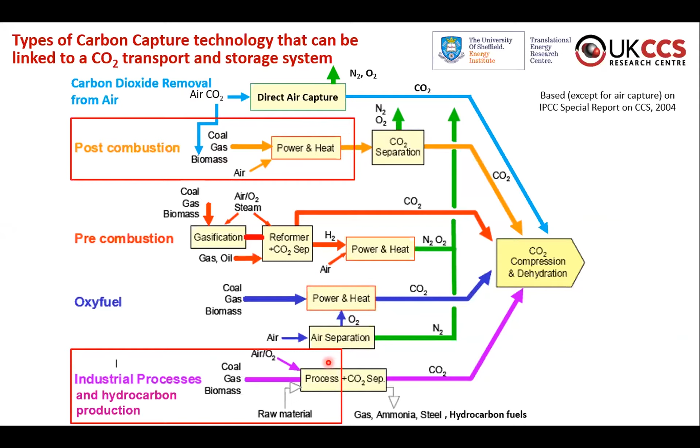It's fairly mature. It looks like it will be deployed in fairly large amounts in the initial rollout, and as I'll show you later, it's likely to keep on going. It's a fairly competitive technology as far as we can see.

So how does it work? Well, there's really only one thing you need to remember about amine post-combustion capture, which is that amines bond to carbon dioxide when it's cold, and they release it when it's warm. That's essentially how everything works.

There is a little bit of finer detail, some chemistry here I'm not going to go into, you can look at afterwards, but one thing you need to remember is for some amines, one molecule of CO2 reacts with two amine molecules, and for other amines, one molecule of CO2 reacts with one amine molecule, depending on the chemistry of the amines. That means amines behave in different ways.

A basic amine is monoethanolamine, MEA, universally known as. These are two carbons, this is an OH group. If it didn't have this NH2, which is basically ammonia, on it, it would be ethanol — it would be drinkable. So the simplest amine is just ammoniated alcohol, a relatively common substance in nature as well.

You can get more complex amines, and they will hold more CO2. Some of them will react faster, but they all come with different characteristics, and you have to take them in the round.

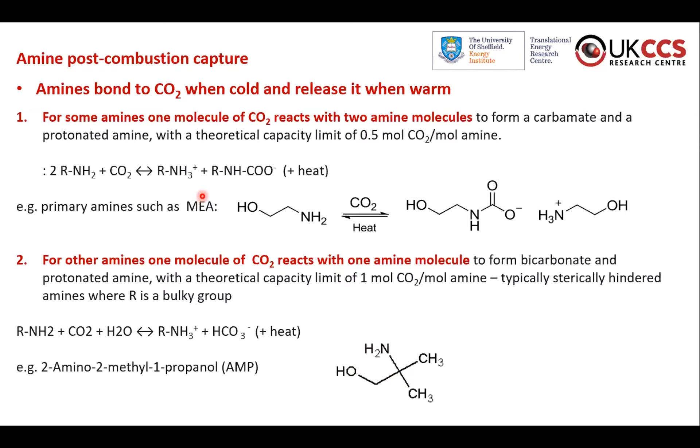So the way you use this characteristic of it grabbing CO2 when it's cold and releasing it when it's hot is you have this circulation diagram, a figure of 8. So we circulate amine in this figure of 8 pattern, and...

The flue gases go through an absorber, which is a large tower, can be as high as nearly 50 meters, filled with corrugated packing, stainless steel, but it looks a bit like corrugated cardboard, which gives a good gas liquid contact area. The whole thing's run at atmospheric pressure.

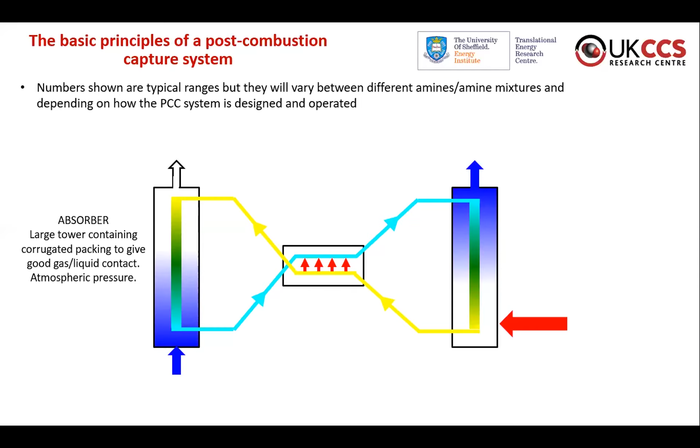Flue gases containing fossil CO2 or CO2 we want to capture come in at the bottom. And what we call lean solvent, lean amine, which has maybe about 0.2 molecules of CO2 per molecule of amine, so it's not saturated, comes in at the top at a relatively low temperature, maybe 40 degrees centigrade. That trickles down over the packing, the flue gas flows upwards, and as a result you take out all or most of the fossil CO2.

That flue gas is then vented to the atmosphere. And then the amine, having picked up the CO2, becomes what's called rich. Depending on the type of amine, it'll have between 0.4 and 0.8 molecules of CO2 per molecule of amine, and it leaves at a slightly higher temperature.

Then to regenerate it, we have what's called a stripper, which is another large tower, probably not quite as big as the absorber because it's operating at pressure, which reduces the volume, typically somewhere between 2 and 5 atmospheres, depending on the amine.

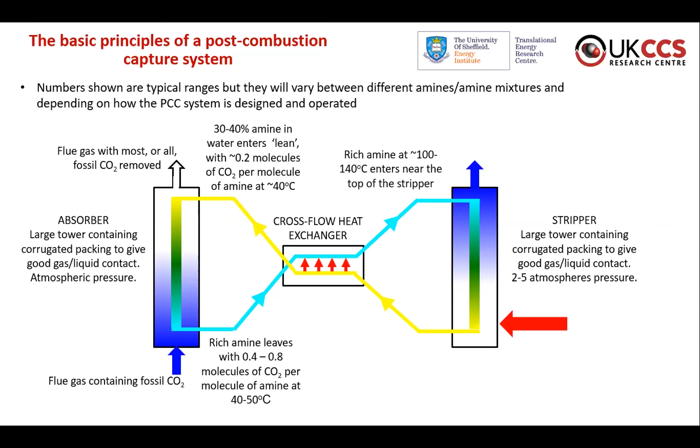Before we put the rich amine in at the top of the tower, it's heated up in something called the cross-flow heat exchanger, so that heats it up to about 140 degrees centigrade. It goes in the top, it trickles down over packing, and steam comes up from the bottom of the stripper, produced by boiling off water vapor, by condensing steam, saturated steam in heating tubes.

That splits the amine CO2 bonds by raising the temperature, and it also provides steam to help carry the CO2 away. After that, the lean amine leaves at the temperature at the bottom of the stripper, somewhere between 120 and 150 degrees C, and high purity CO2 is released, better than 99% purity, mixed in with water vapor. The water vapor is condensed, and the CO2 goes on to be compressed, transported and stored.

So that's the whole process. The equipment's a bit more complicated than that, but the basic concept is very, very simple, and it's been in use for nearly 100 years.

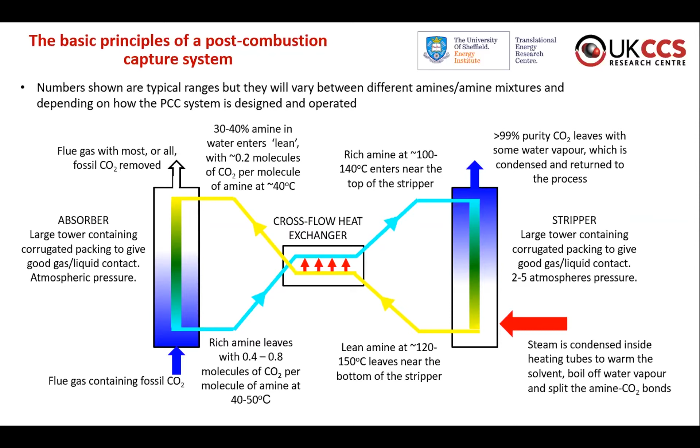I said post-combustion capture was fairly competitive. This was an assessment done for BEIS by Wood, looking at different types of power plants with CO2 capture. So this is a gas turbine combined cycle plant without capture, paying quite a lot of money for CO2 emissions. This is a similar gas power plant, but with post-combustion capture. At the carbon price that was assumed, it's more economic to capture the CO2.

Now, compared with other options, producing and burning hydrogen is less efficient and has higher capital costs, so that's significantly more expensive. There are applications for that, though—we'll talk about it a bit more in the next seminar. If you can store the hydrogen and produce it in a relatively small plant which runs all the time and feeds the storage, and then you draw off the storage infrequently to meet a peaking load, it can be competitive.

But for any reasonable load, certainly above about 50% load factor, post-combustion capture will be cheaper. Also, compared to supercritical CO2 cycle, the Allam cycle, we estimated that it would be competitive, and also compared to using molten carbonate fuel cells. Obviously these technologies are nowhere near as developed as these two, so it's not entirely clear what the actual cost and performance will be. But nonetheless, post-combustion capture looks to be a pretty reasonable option, even though it has, as I say, been around in some form for quite a long time.

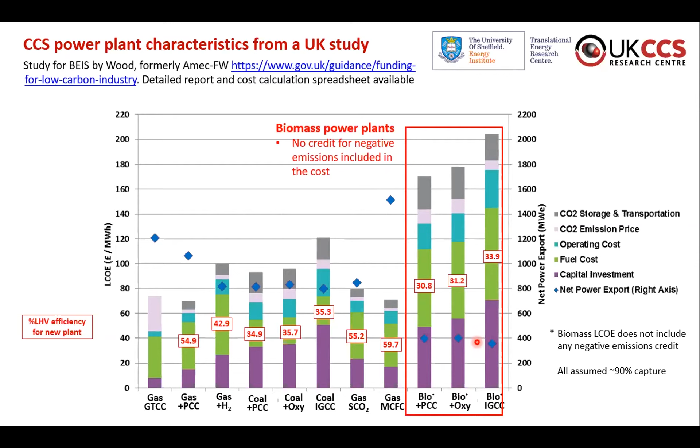Even though the efficiency is higher, the capital cost is expected to be significant, and there may be some technical issues as well. So the bottom line is post-combustion capture looks like it's going to be around for a while, particularly as it gets developed, and costs will inevitably come down a bit.

One of the reasons post-combustion capture works so well is that you can supply heat to regenerate the solvent very effectively. You need quite a lot of heat, but it's at low temperatures, so it's of very little value for generating electricity. You're condensing steam from the power plant in heating tubes, and that steam was going to be condensed anyway in the power plant steam condenser. So you typically get 4 or more units of heat for every unit of reduction in electricity output.

It also means, to get that ratio, you need to run a CHP plant if you've got a non-power application in industry to get the same benefit. And you will also, as well as that heat, need some electricity to run the fans, and in particular the compressor for the CO2. Just to illustrate that, this is the energy, 100 units of energy going into a gas turbine on a gas turbine combined cycle.

It's a slightly older unit, produces 37 units of electrical output. The rest of the energy is heat in the exhaust gases, which go to the heat recovery steam generator, the waste heat boiler. Most of that ends up as energy in steam, but the steam turbine can only extract a bit less than half of that, about 40%, on a plant without capture. And the rest of the energy goes through this thick grey arrow to the condenser.

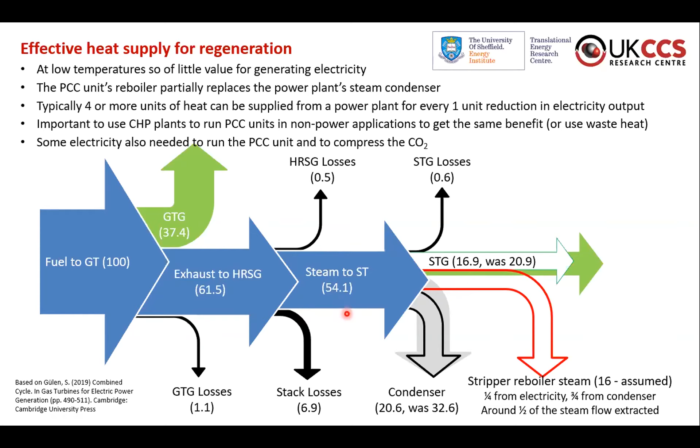This steam turbine process and the condensation, as you can see, in some ways is not very efficient. It's as efficient as it can be thermodynamically, but it was going to throw away a lot of heat anyway. You might as well throw it into the post-combustion capture plant. It's quite hard for people to get this because they don't often look at linking heat supply with efficient processing of fuel energy. But once you do link that, and this is what I was basically working on 20 years ago, post-combustion capture looks very, very good.

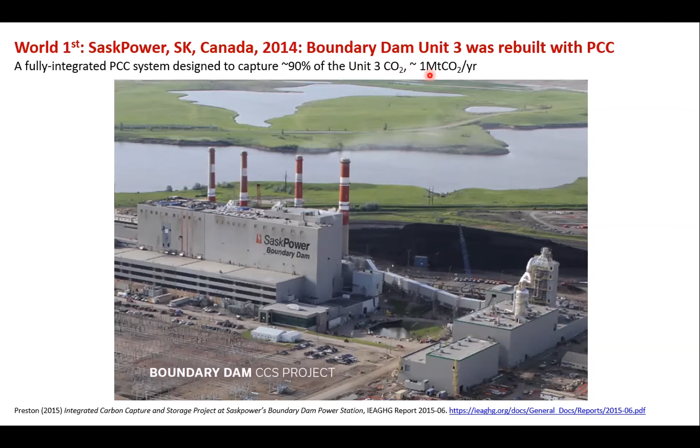Everything's hidden in a box. It gets very, very cold in Saskatchewan in the winter, so you're not able to put the plant outside. This unit captures about 90% of the CO2, and it's about 1 million tons of CO2 per year. I'd say that was the first one. The second large unit on flue gas was at Petra Nova power plant in Texas, much warmer. You can see everything's outside here, they don't worry.

This one's a bit bigger, captured about 1.6 million tons of CO2 per year. Here's the absorber again, and the stripper. Here's the flue gas duct, in this case a round one, taking the flue gas to the flue gas desulfurization unit, which is required because this is a coal plant.

They didn't take steam from the power plant itself. They had a combined heat and power unit powered by natural gas, which is relatively cheap in the US. This unit became operational in January 2017, and it shut down in mid-2020. I'll discuss that in a moment.

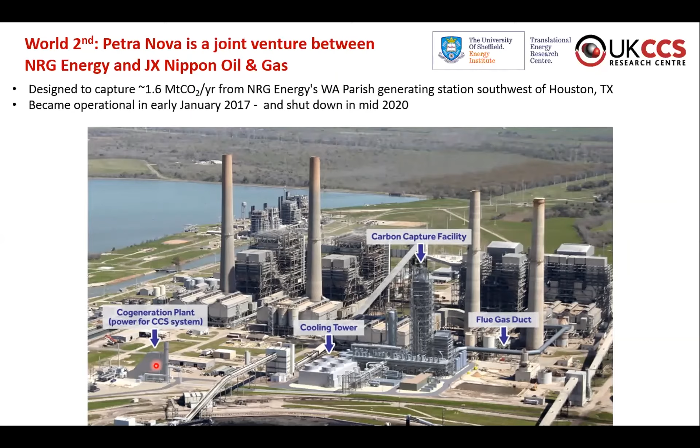Experience from these two units is that the operating costs, effectively the levelized cost of capture, the total estimated cost for capturing CO2 can be quite high. You have a capital cost element, quite high for Boundary Dam. It's an expensive place to build things, Saskatchewan, and it was a small plant. Much lower for Petra Nova - you get good productivity in Texas from labor. But as well as the capital, you've got running costs.

You've got a fuel cost, the extra fuel that's burnt, a relatively small contribution. You've got some fixed operation and maintenance. And then, fairly surprisingly, there was a very large element for variable operation and maintenance reported for Boundary Dam by the Global CCS Institute. This is basically for replacing losses in the solvent and managing ways to keep it pure enough to operate. As you can see from the text below, this would be expected to be of the order of $5 per ton, and it's well over 20.

It's also relatively high for the Petra Nova plant. Now, Boundary Dam is still running - I suspect they've got this cost down a bit, although it's probably still high. Petra Nova isn't running, and I think the reason could be that if you look at the total variable costs, it's over $20 a ton of CO2, and this unit was sending its CO2 for enhanced oil recovery, where a ballpark figure for the value of CO2 is about $20 per ton.

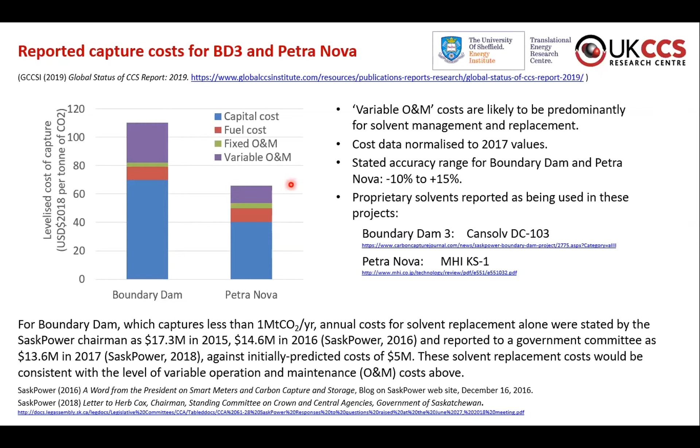So some key priorities in light of what you have to see as problems. Obviously they're successful in that they ran, but not as successful as we would have liked. The first point is that it's not clear what's happened. There have been reports on these plants, but many of the key details are omitted on the grounds of the solvent being commercial and requiring confidentiality. So we just don't know what's happened - you're looking for details in obscure places and certainly not getting the full picture.

However, it is pretty clear from evidence given to the Saskatchewan Government Committee that higher than expected solvent management costs were incurred. And as I say, we do know that Petra Nova isn't working, so they must have higher running costs than revenues.

So the obvious response to this first problem is, if you've got a project that's only possible because of government support, require full disclosure of key features and results, especially the problems, to allow industry learning by doing. It isn't necessarily giving away all the secrets, it's just saying did it work, how did it work, what were the numbers. I think quite often these are kept secret because, particularly when you get a problem, people are embarrassed, not unnaturally. But if we don't learn from the problems, they'll keep being repeated.

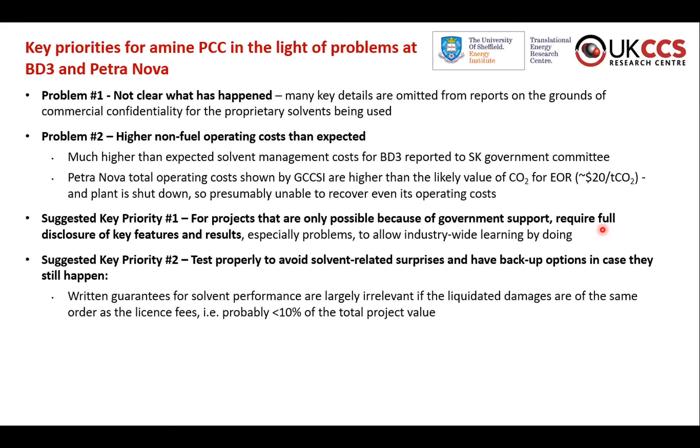And then, particularly on this solvent management issue, it's important to test properly to avoid what I call solvent-related surprises, and also to have some backup options in case they still happen. What you see is that when you get a guarantee for solvent performance, it's of the same order as the license fees - probably less than 10% of the total project value - and it really doesn't compensate for the potential problems.

So the only assurance that things will actually work is to do extended testing on a realistic pilot plant, ideally using the actual flue gas from the plant that you're going to retrofit, if it's a retrofit or a very similar plant. And you need to test for about a year, because it can take quite a long time for these degradation reactions in the solvent to happen.

It's important that you demonstrate that you can reclaim the solvent, which is separate the good solvent from the impurities. That's a very important part, and it's often omitted from research-type pilot tests.

Also, it's very important that you can change to an alternative solvent if you're having problems. You'd want to do this anyway because solvents are going to be improved, but you might need to do it in a hurry if your costs are too high. This is apparently more of a commercial issue than a technical issue. Boundary Dam, in fact, I believe was designed for alternative solvents, but they found they were tied up by contractual arrangements and couldn't change.

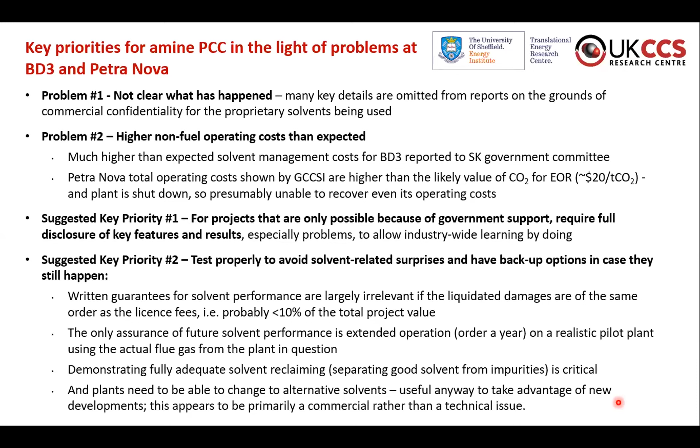So solvent selection criteria is a fairly important part of the overall process to get a successful project. Health and safety is your first consideration, and absolute standards have to be met.

And what appears to be one of the more interesting areas is conversion of trace emissions of amines, parts per million coming over in the flue gas, but relatively noticeable amounts when you've got very large plants, and particularly multiple very large plants, as the UK is expecting to have. These traces of amines can be converted to nitrosamines in the atmosphere, and those are highly carcinogenic, and we've got very low environmental loads for those.

At the moment that has to be assessed by modelling. The techniques for modelling are still being developed, and when we get larger plants, we'll be able to do more measurements as well. So this is an area of interest, and John Henderson from the Environment Agency will be talking about environmental aspects of CCS later in the series.

You also want to be able to capture a lot of the CO2 that's coming out, and we're looking at now going above 95% capture. Overall costs are obviously important - we want to get them as low as possible. There's a lot of different elements for those, which I'm not going to go through, but it's a package.

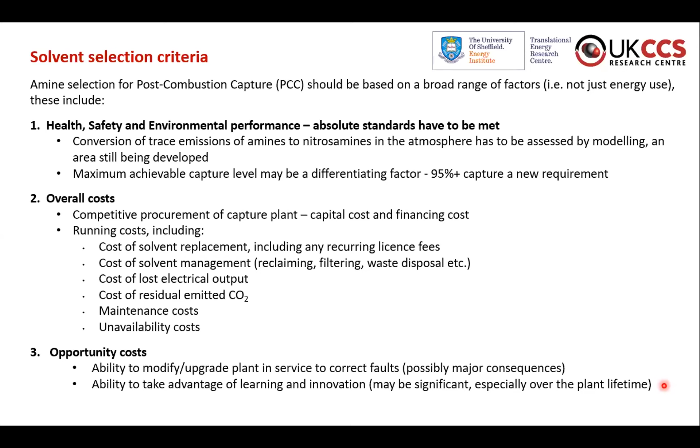Some trade-offs - I mentioned that you get different properties. Typically, primary and secondary amines, types of amines, have higher rates of reaction.

Monoethanolamine, MEA, is one of the oldest in use, and it's got a high reaction rate. But it can only get this 1 to 2 stoichiometry with CO2, so it can't latch onto as much CO2 as some of the other amines, which bind 1 to 1. Another type of amine, tertiary amines, have high capacities, but the kinetics are lower, so you try and use them in blends. So you've got a lot of permutations, a lot of trade-offs.

But then from a health and environmental safety perspective, MEA is biodegradable, so it's often found in nature. Some other amines are more toxic and not so easily biodegraded. Secondary amines, not primary amines, can react with NOx in the flue gas to form nitrosamines, and the reactivity varies with the amine structure. So you have a fairly complex balance of factors to take into account when selecting which amine to use.

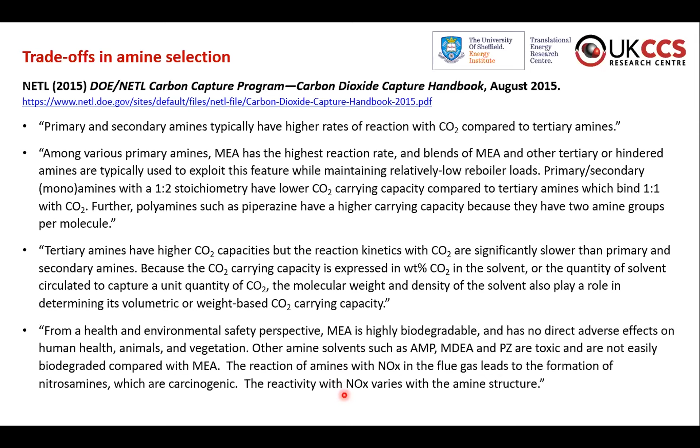So this, I think, conversion in the atmosphere is the main consideration in getting satisfactory environmental performance. As I say, it's too low to measure easily - it has to be estimated through modeling.

You need to look at the amount and type of amines coming out in the vented flue gas, and you've got to look at the amines from other plants in the same area. You've got to look at what's in the atmosphere in terms of NOx, and you've got to look at atmospheric conditions. So people will be doing site-specific modeling to work out how much is safe to emit from a plant.

You can do a lot on the plant itself to control what comes out. I've put this in the PCC emissions control triangle. First, select the amine, which will give you a mix of properties: reduce degradation and impurity addition rates, and accelerate removals, so you keep your amine nice and clean. That helps a lot. You then trap potential emissions at the absorber exit.

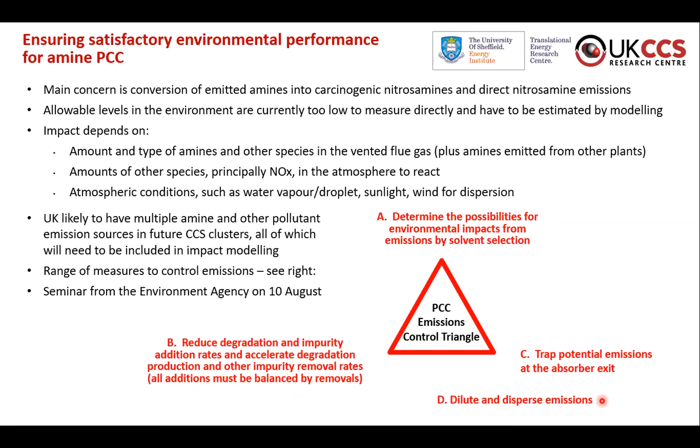You can do an awful lot there with washing it with an acid solution. And then finally, you dilute and disperse the emissions by making sure that you emit them high enough and with a flue gas stream that's warm enough to rise and mix. There's a lot of detail in there which I'm not going to discuss, but it's there to look at afterwards.

One of the areas that's received a lot of attention is the energy that different solvents require and the effect this has on the overall cost. But as I say, it's a complete package.

When you look at the estimated costs, this is from a study done for the World Bank, a retrofit to a gas turbine combined cycle plant in Mexico. If you take a range of commercial solvents, these are the ones that could be in use now - basically there's no difference between the numbers, and indeed they're not much cheaper than monoethanolamine at 30%. We'd be looking at using 35% by weight now, which would make it a bit better. So it does seem that, at least superficially, there isn't a lot of difference between solvents.

The differences will come in the fine detail, and I think particularly in terms of the environmental performance.

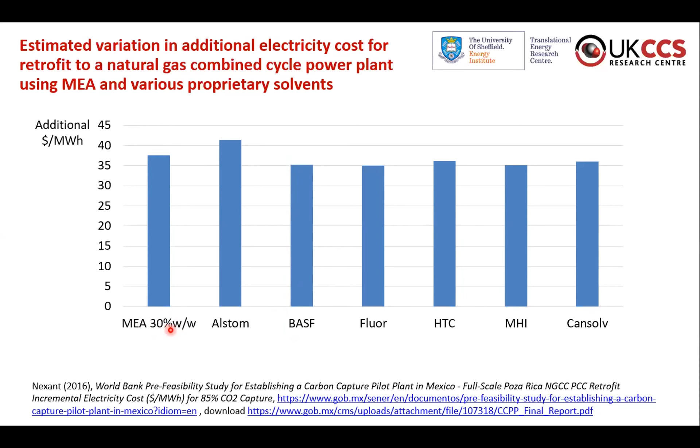Some examples - we might see in the UK, this is one that's actually happening: a post-combustion capture plant at Tata Chemicals, Northwich in Cheshire. BEIS kindly gave 4.2 million towards it. It'll capture 40,000 tons of CO2 per year, so it's quite small - a 25th of the million ton a year size - but nonetheless it looks pretty big. It's probably about as high as a real absorber would be, about 50 meters.

This was supplied by Pentair Union. It uses 35% by weight MEA, and this is continuously cleaned, continuously reclaimed. Pentair Union have built over 20 plants around this size, mostly using natural gas sources. So this will be running soon - really looking forward to seeing that.

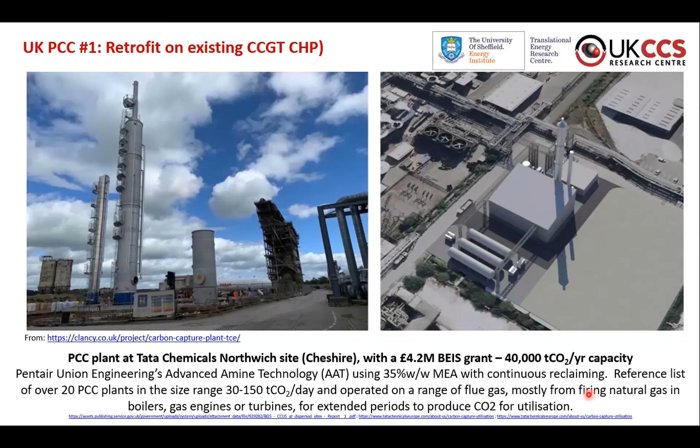However, the big plants in the UK being planned - places like Teesside, Humberside - post-combustion on large gas turbines, they follow on from a study that was done by the Energy Technologies Institute a few years ago, looking at bringing the cost of gas power with carbon capture and storage down by building large units with multiple turbines, in this case 5. I think probably more realistic to find 2 at the moment.

So we've got a gas turbine here - this is opened up, this is the actual turbine, the gas turbine. This is the heat recovery steam generator. This is a stack vent for when you're not capturing, and then this is going through to the capture unit and the stripper, all combined here. And this is the cooling. As I say, there's 5 units shown here to get economy of scale.

You can look at the report for this - it's available now, it's quite a lot of documents, and also an even more detailed FEED study, front-end engineering design study, with about 200 documents for a 1 million tonne a year retrofit that was in fact never built, in Norway, available on our website. So you can get quite a lot of detail if you want to go into that.

Another application is a new build or retrofit on biomass. This is a post-combustion plant that was looked at in a feasibility study, not for a biomass plant, but for a brown coal plant with similar properties in Australia.

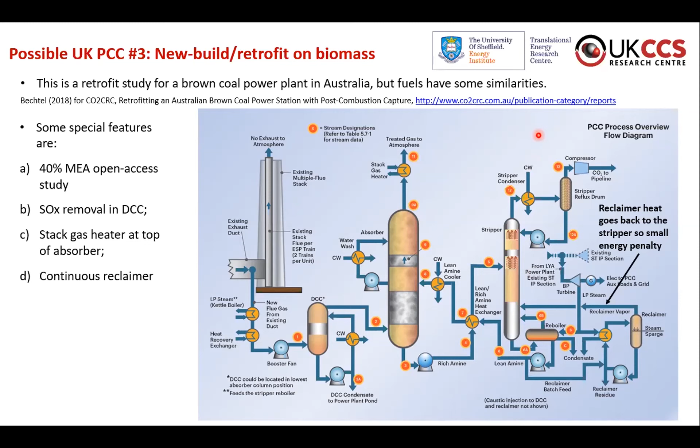Again, this is available - it's an open access study because it uses MEA, and you can download it from the reference given if you want to have a look in more detail.

Another application I think we're quite likely to see a number of is CO2 capture from incinerators. This is one that's been built at Duiven on an AVR plant in the Netherlands. This is the absorber, the stripper, and then you've got the direct contact cooler and a wash column put together here. This is 100,000 tonnes per year. It's sold to the greenhouse industry. And the estimate is that in Netherlands, they were able to capture about 2 million tonnes a year of CO2 from the incinerator sector, which is quite a significant part of their overall strategy.

And there's a number of other plants being built, some with proprietary amines, some with MEA. You'll be getting an overview of the Netherlands CCS plans on the 29th of July. But hopefully we'll be seeing some plants like this on incinerators in the UK.

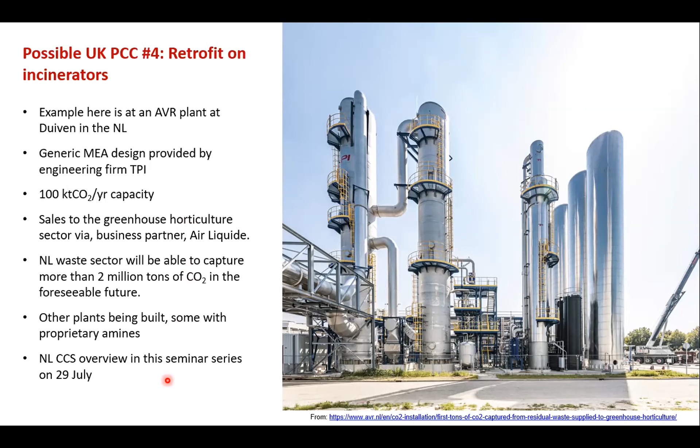Another possible application is post-combustion capture on a steam methane reformer. This is a study, same study actually as I showed earlier, that Wood did for BEIS. A steam methane reformer uses burners venting to atmosphere - it's shown here on the steam methane reformer. And so you put post-combustion capture on those, on that flue gas, to capture the CO2.

We'll talk about this more in the next lecture, but the syngases containing hydrogen come out, you refine them to get as much hydrogen as possible, take out the stuff you don't want, put it back in the burner. So all of the carbon basically ends up in the flue gas and you capture it. If you just capture carbon from the process and not from the flue gas, you can get maybe between 55 and 70% of the CO2 captured - there's a reference for that. But if you capture from the flue gas, you're not limited to that number - you can get up into the high 90s.

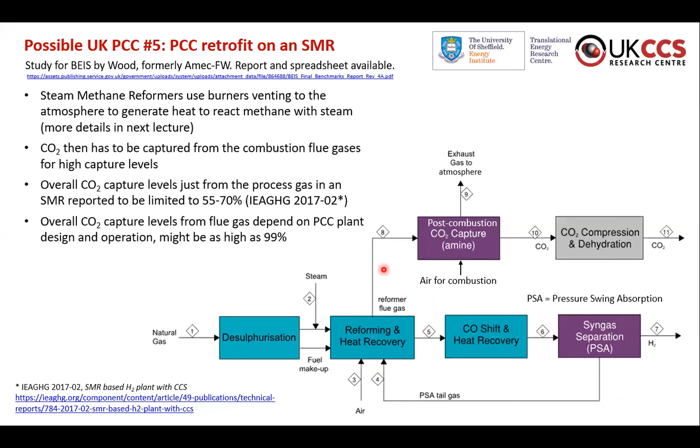Just a bit of a plug for the UKCCSRC - as part of our core research program, we've actually looked at improving on this by using a gas turbine to provide flue gas to these burners in the steam methane reformer to substitute for the air. This allows you to recover some of the heat, and also allows you to capture the CO2 from both the steam methane reformer and the gas turbine together, which is expected to reduce overall energy consumption and cost compared to building separate units. So this is something that industry has looked at. Whether it'll actually happen, I don't know, but it's a fairly sound basis for achieving some cost reduction if you want to produce power and hydrogen at the same time.

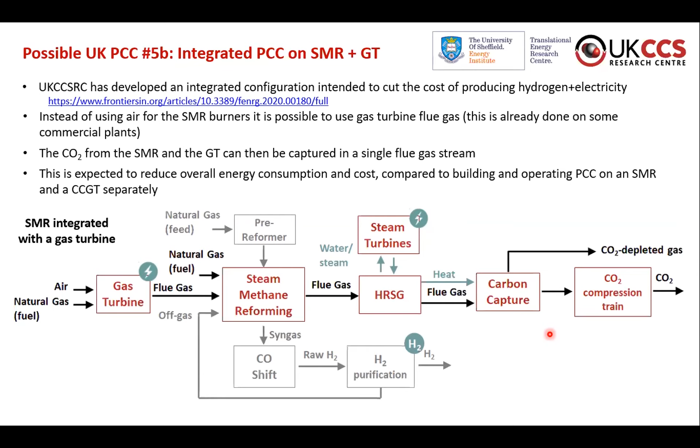Obviously, another application, a big application, is industry. As I said, post-combustion capture can be applied to any flue gas, so you've got lots of different sources - refineries certainly being looked at, glass furnaces, cement kilns, limestone kilns - any flue gas source.

If you're retrofitting though, there's space issues. You have to worry about the flue gases being hotter than the amine plant can take - they need to be at about 50 centigrade. There may be SOx and NOx. You've got to be able to supply heat effectively - waste heat is best, but use a CHP if you can't do that. One thing you might do is separate the absorber and the stripper, so you have multiple absorbers on different stacks on a site and then share a common large stripper.

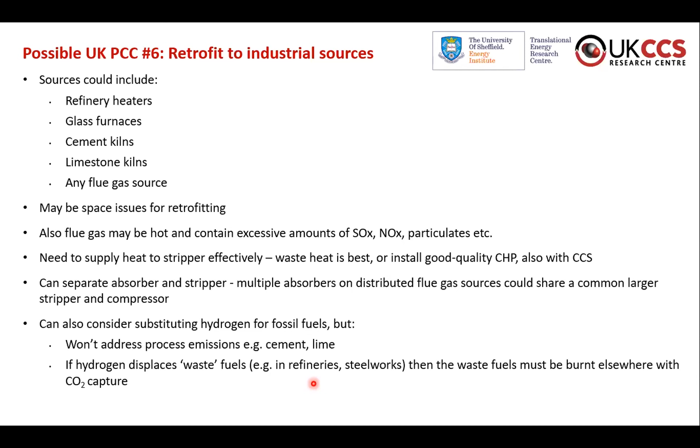You can also substitute hydrogen for fossil fuels to avoid post-combustion capture, but this won't work with processes that produce CO2 as part of the manufacturing, like cement and lime. Also if you're in a refinery or steelworks, these burn waste fuels from the process, and if you use hydrogen instead, the waste fuels are still going to be burnt somewhere with CO2 capture.

So this is an example of a plant, now in Norway on the Brevik cement plant. The coloured bits are what they're adding - this is the absorber, this is the stack on the absorber, a great big stack to get good dispersion. This is a relatively small unit again, 400,000 tonnes a year - it only captures 50% of the cement plant's emissions.

I don't know how long they'll be able to carry on doing that because they're only using waste heat from the plant. They would need a CHP unit as well to be able to capture all of the CO2. Special feature over here is the loading dock to load up the ships, to take the CO2 several hundred kilometres around the Norwegian coast to their storage site.

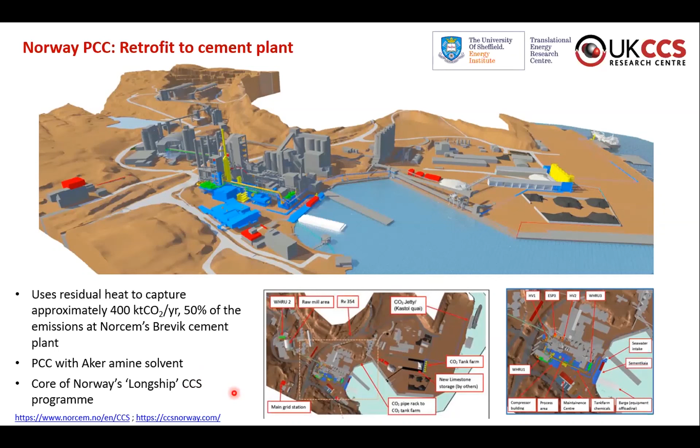You often hear people in the UK saying, oh, well, you know, we've got a cement plant, it's remote from storage. Well, very few are as remote as this site in Norway. However, it is quite useful being able to get big vessels in to take the CO2 away. That's very helpful. So this is the core of Norway's Longship CCS program, and we will be hearing about the Norwegian CCS program later too.

For power plants operating under the dispatchable power agreement, it's a good idea to operate at as high a capture level as possible. And again, a bit of a plug for research that we've been doing. It looks as if you can get up to even 99% capture, in this case with MEA, but I think with other amines as well, some of them anyway. And 99% capture on a gas turbine flue gas is actually all of the fossil CO2. The 1% is what came in with the air.

People have shown very high capture levels at a test centre in Norway, test centre Mongstad, so it does look like it's feasible. And in discussions with industry for the BAT process, it looks like 95% will become design level. So the plant will be designed for 95%, and then, as I say, under the dispatchable power agreement, it'll probably operate at the highest capture level it reasonably can, because it'll make a little bit more money that way, as indeed it should do.

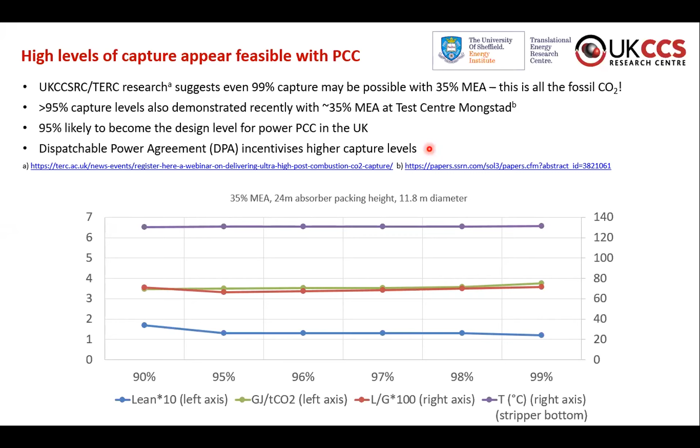The other thing is that you need to be able to capture CO2 at a high level while the plant's starting and stopping, because the dispatchable power agreement will penalise plants if they emit CO2 at any time during their operation, perfectly reasonably. The issue there is that the gas turbine can start up very quickly, but it takes some time to generate steam in the heat recovery steam generator. So you've got CO2 coming out of the gas turbine, going through the absorber here, but you won't be generating fresh solvent in the stripper.

So the solution here, which has been proposed in a report for BEIS, commissioned on startup and shutdown times of power CCUS facilities, is relatively simple. It's to provide some storage of lean amine and some storage of rich amine. Until you can regenerate your solvent, you just run amine from one tank to the other through the absorber column, and it picks up CO2. Then when the plant's up and running, over a period of time, you regenerate this captured solvent in parallel with your normal operation. So I think we can achieve very high capture levels, and it will pay for the plants to do that.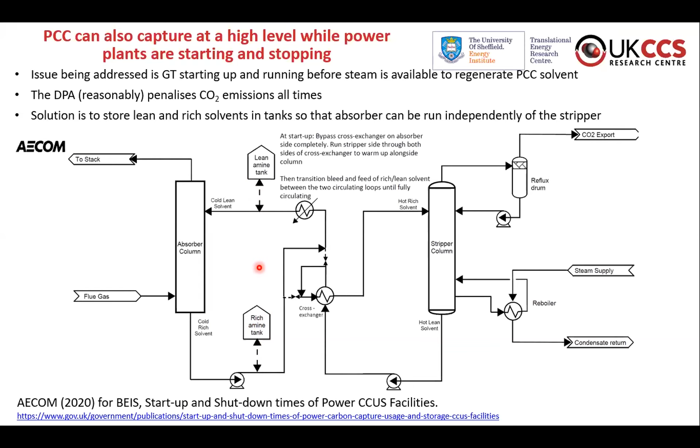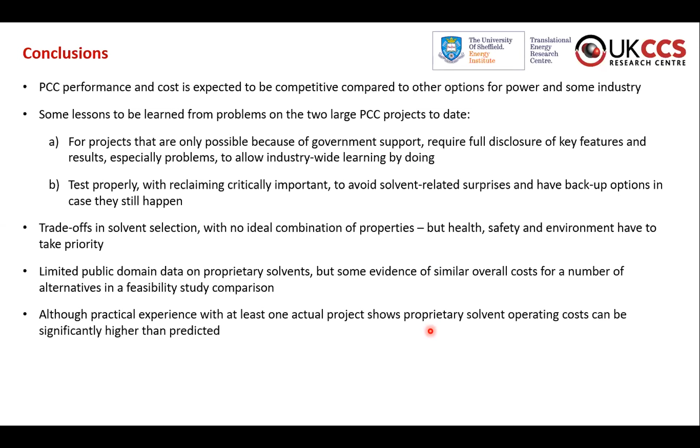There's limited public domain information on proprietary solvents, but some evidence that actually, at least on simple comparisons of energy, capital cost, whatever, they get similar numbers. Although, as I said, we do have evidence that at least one project showed that you get surprises on details like operating costs, which are expected to be low, but can turn out a lot higher than you expect.

Post-combustion capture, though, has very many potential applications in the UK and globally, and I suspect China, well, sure, China will have vastly greater amounts of post-combustion capture on its coal plants than the rest of the world put together. High levels of capture, 95% and above, are becoming the norm to meet net zero requirements. That's something that's changed relatively recently, but it shows that the technology can be improved to meet new demands. So that's it. Thank you. Any questions?